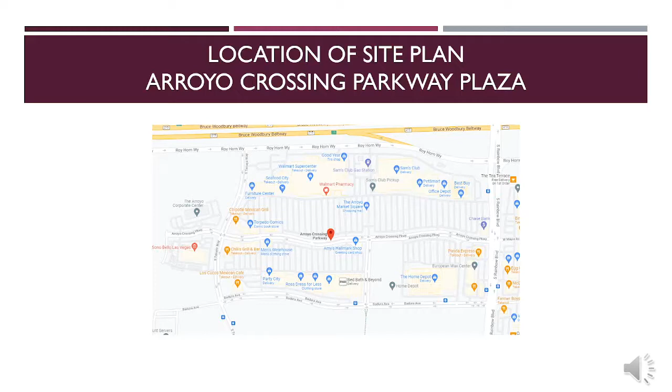One of the already existing conditions at my site, summarized by the environment, is that it's mostly commercial, restaurant, and there's office areas as well. There's a lot of space in this area with a lot of parking lots that aren't really ever full. This site is also very car orientated, and the roads are pretty flat most of the time. There's no slopes or hills at all. And there are some intersections in the plazas that don't have traffic lights, but they're just kind of like four-way stops.

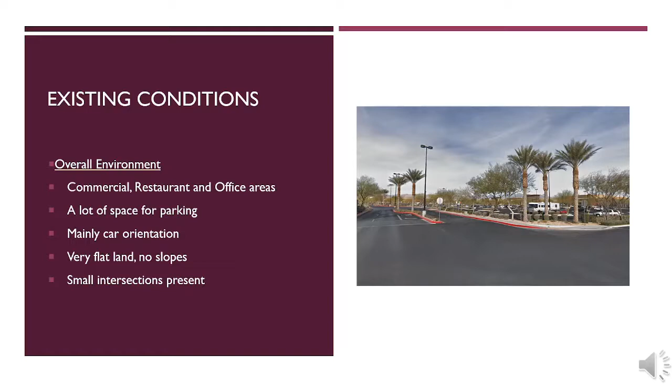Some of the pedestrian facilities that are currently at my site are that there's footpaths that are made out of mostly dirt, and there are sidewalks. Currently, the sidewalks are only on the left side of the road, though, and the sidewalks that are present are in actually really good condition. As you can see in the picture, it looks like they were just painted as well. And another thing is that there is a large presence of greenery around the site. You can see as well on the picture that there's a lot of greenery planted around the sidewalks and the footpaths as well.

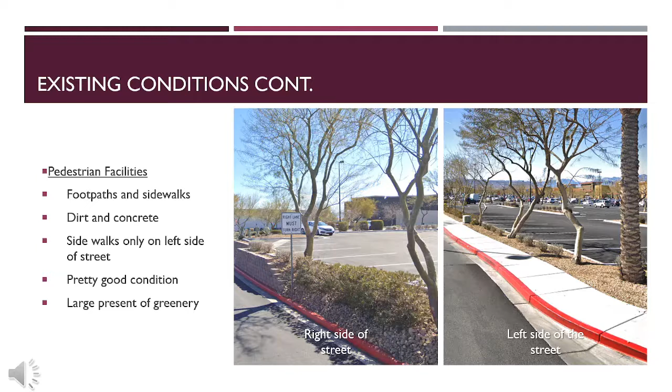Some of the existing road attributes in my site include that the roads are in fair condition. There are some cracks on the road, and the paint on them is a little bit faded. And there are signs, traffic signs that are present as well. There's speed limit signs. There's quite a lot of stop signs and fire lane signs as well. And they also have a large parking lot with a lot of spaces and greenery medians as well.

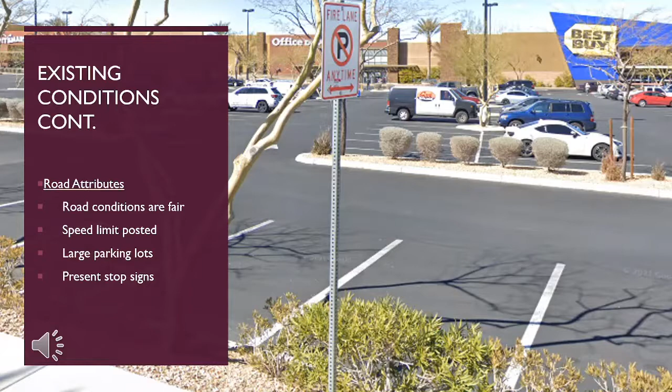Now for the walking and cycling conditions that are present at my site. There's not a lot, it's very low. There's some good lighting and pedestrian lighting where the sidewalks are at. There's also a lot of trees that do provide shading on the sidewalks too. The building maintenance is actually really good. There's no obstructions that are visible, and unfortunately, there is just one bus stop that is located kind of outside of the plaza, so the pedestrian would have to walk a little ways out of the plaza to actually get to the bus stop.

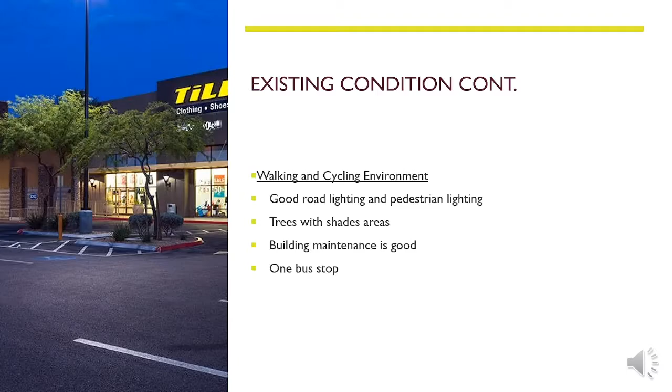Now, to get to my recommendations, the first recommendation I would add to improve the active transport are speed bumps or speed humps. The roads are pretty flat, and the drivers still tend to speed through the street that goes through the plaza. So, as you can see on the picture, that long street, the Arroyo Crossing Parkway Street, that's also where the sidewalks are present, and people probably do not feel safe walking through there since traffic tends to speed. So, adding speed bumps can actually lower the speed by at least 8 miles per hour, and the estimated cost would be $1,500 to $3,000, depending on the road conditions and other factors as well.

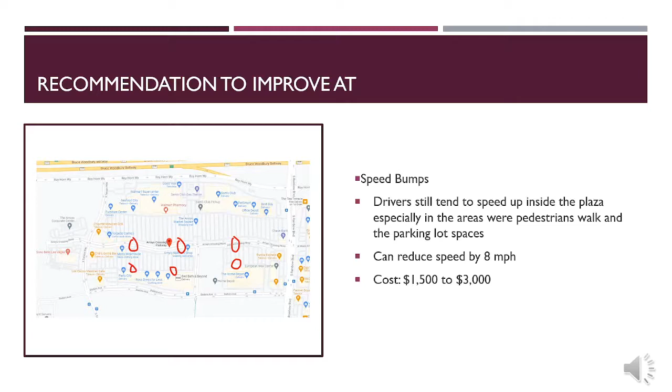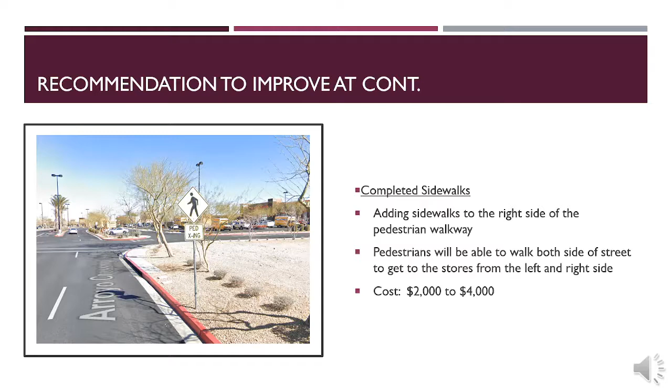I would also want to complete the sidewalks that are present. In this picture, you can see that there are sidewalks that are not complete. I think maybe because when they had built the road designs, they added signs that were in the way before the sidewalks were made in the area. But the rest is just dirt and it continues on for a while, till it hits another section that does actually have sidewalks, kind of near the intersections. I think this would be very helpful since people will not have to cross the street to get to the left side where there actually is sidewalks that they can use. The estimated cost for this can be up to $2,000 to $4,000. Again, it's depending on the location and other factors on the site.

I also believe that medians are a great way to reduce speed and can help the pedestrian feel safer when actually crossing the street. So it's kind of like an area where they wait and see if traffic is going too fast or is not safe. It also can improve overall environment since the site is mostly just parking lot and roads for the cars. It would add more of like a pedestrian orientated feel as well. I believe that medians are a little more costly though because they require a lot more construction and planning. So the estimated cost I think would be about $5,000 to $15,000.

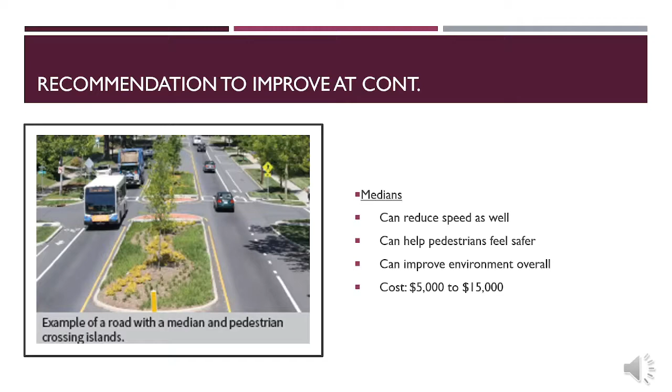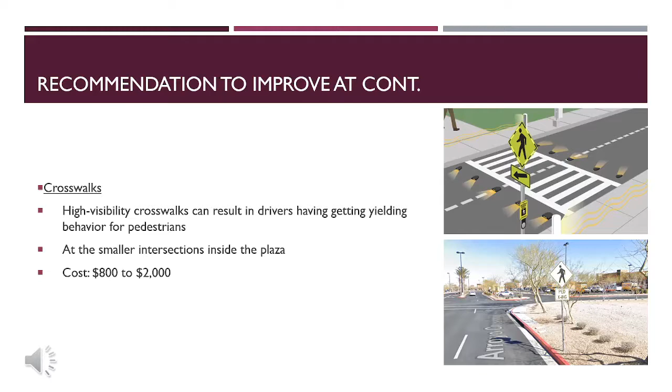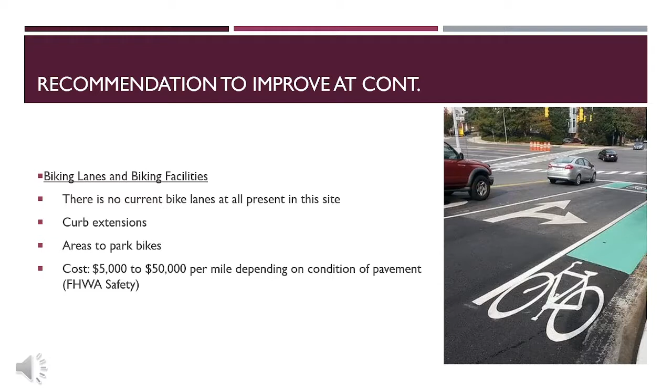The way I would evaluate my plan is by doing a before and after of some of the surveys that I mentioned on my first site plan. This includes having a community survey of people that live near the area and actually go to the plaza. And also, it might take some time, but looking at data that is provided by some of the government websites that we have access to that have data about pedestrian safety. That way, we can see a clear statistic way to see if people are feeling safer and are actually walking more in the area. I think it's important for overall safety in the environment. So if it feels safer and calmer, I think it would most likely be a success.